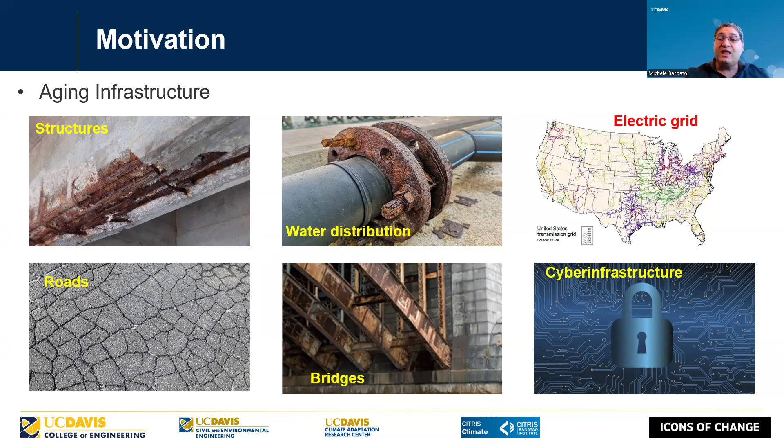In addition to that, we are also suffering a housing crisis. There is a severe supply shortage of housing in the United States and actually in the world. It is expected that in the next 50 to 80 years, we will need 2 billion new homes in order to address the increase in population and the improvement of quality of living in the world. So we need to find a way of producing affordable and sustainable housing for everybody.

At the same time, we have the big challenge of climate change with the issues in terms of mitigating the emissions, producing homes and infrastructure that are more sustainable, but also that can adapt to the changes and improve in resilience. And we need to do that with an eye to equity and climate justice so that everybody can benefit from the development and the improvement that are needed to address the problem of climate change.

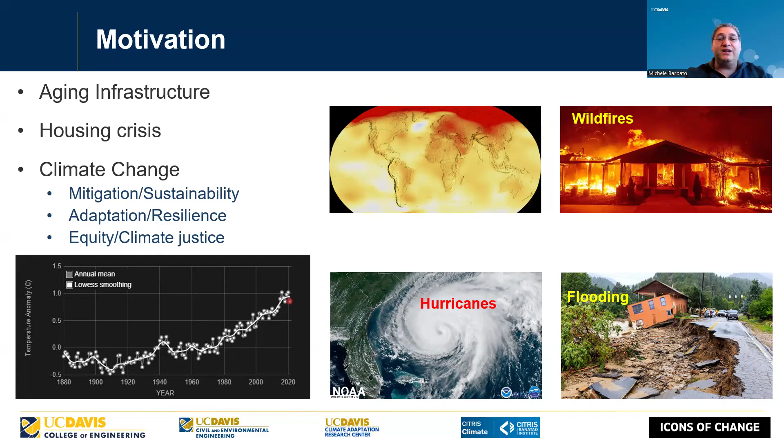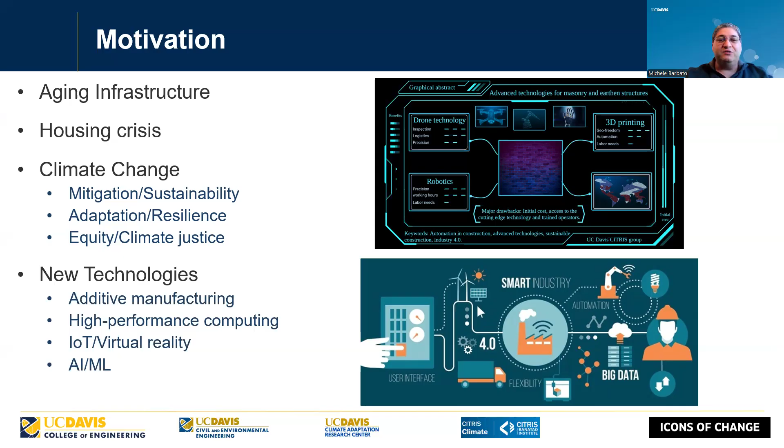At the same time, we have a big opportunity thanks to the new technologies that have been developed, such as additive manufacturing and 3D printing, high-performance computing, virtual reality, and artificial intelligence and machine learning. So these are tools that are becoming available and that can help us in addressing the issues that we have identified before. So how is the research of my research group addressing this problem, and where are we providing our contribution? On one side, we are developing nature-based solutions.

We are developing new engineering knowledge for earth construction that is characterized by low embodied energy, low operational energy, so highly sustainable materials that are also very resistant to natural hazards, including hurricanes, fires, tornadoes. Here you can see a fire test on our earth block and a windborne debris impact test of our earth

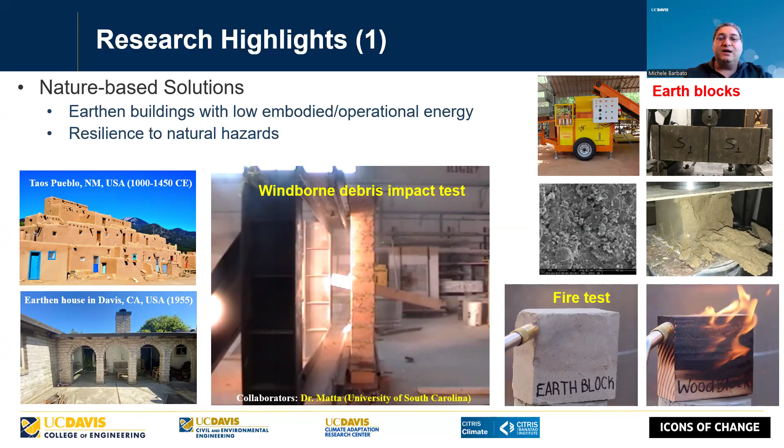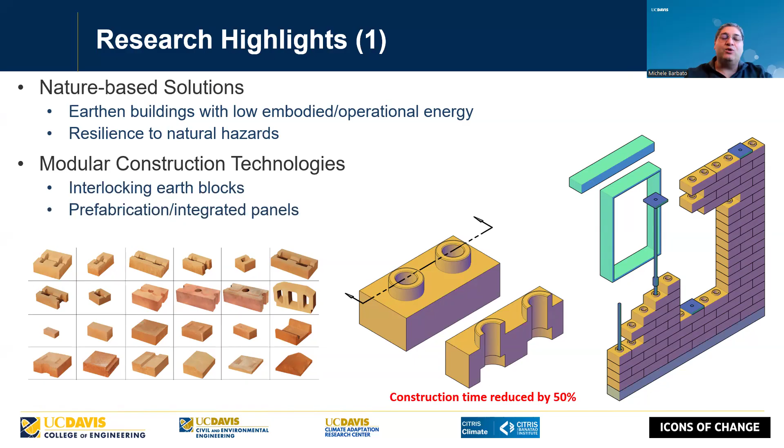blocks construction. We are also developing modular construction technologies, for example, interlocking mortarless earth blocks and prefabricated or integrated panels that can be used so that we reduce the waste of materials during construction and we make the construction more efficient and sustainable. And we can also reduce construction time with our technology of interlocking mortarless blocks up to 50%.

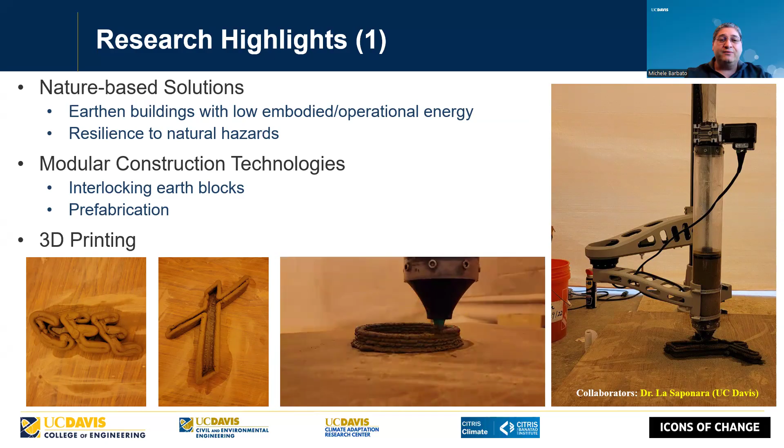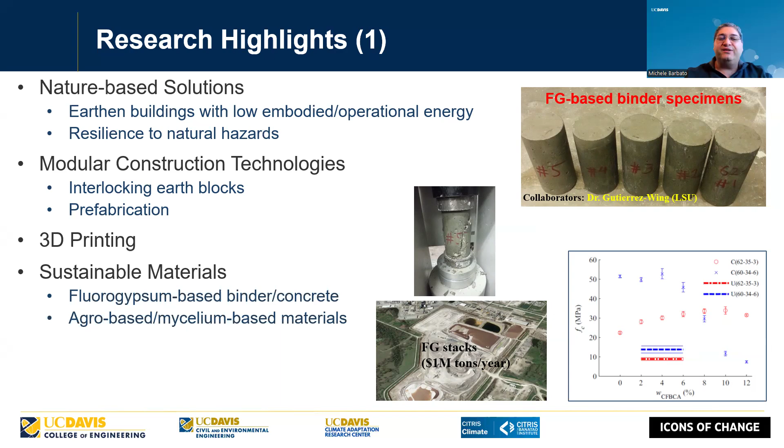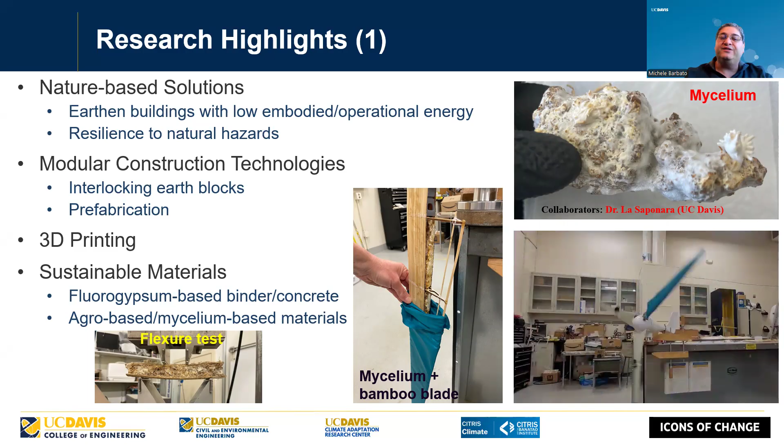We are also working on 3D printing. On one side, the more classical 3D printing of cementitious materials, but we are also working on 3D printing of soil-based materials, again, in order to achieve at the same time sustainability, affordability, and safety. And then we are working on other types of sustainable materials, on binders and concrete that are substituting clinker with, for example, fluorogypsum, with agro-based materials, with mycelium research that is using fundamentally mushrooms to build materials that can be used for construction of buildings and also to substitute blades of wind turbines.

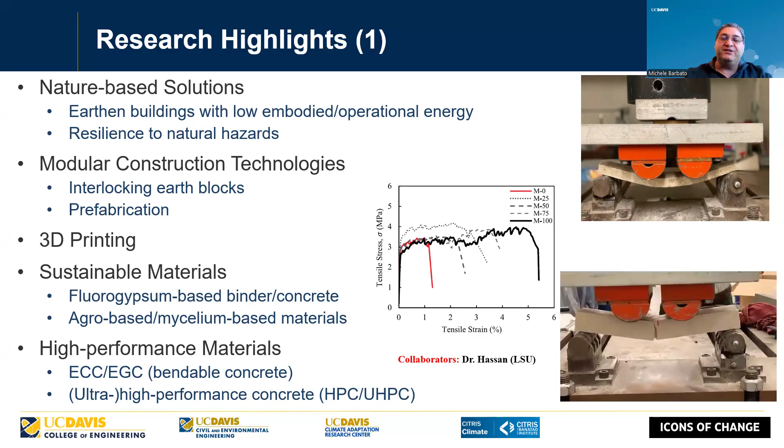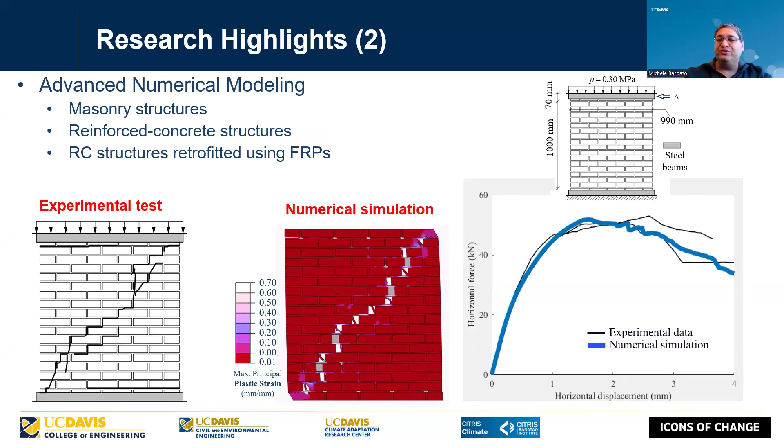And then we are working on high performance materials, on engineered cementitious composites and engineered geopolymer composites that produce fundamentally a bendable concrete that can deform much more than normal concrete and reduce damage or self-repair, as well as high performance and ultra high performance concrete. We also are developing advanced numerical modeling for masonry, for reinforced concrete structures, for reinforced concrete structures retrofitted using FRP. And here you can see one of our models and the capabilities of reproducing the mechanical behavior of masonry walls.

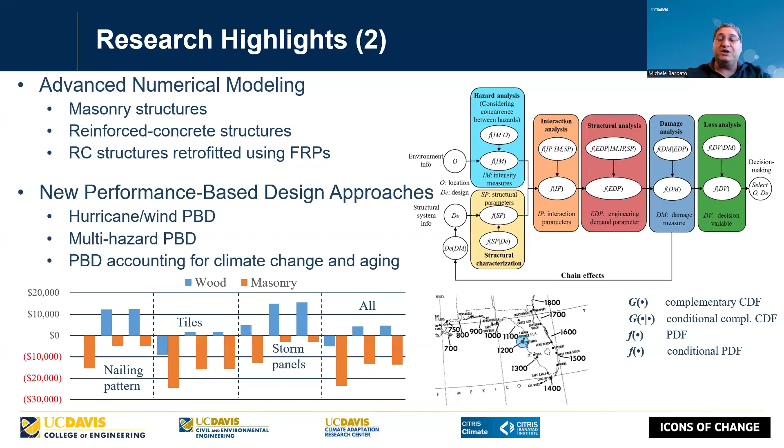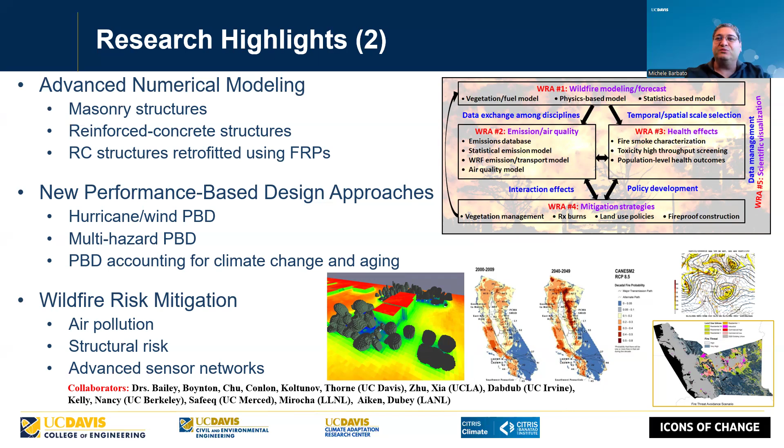We are also developing new performance-based design approaches for hurricanes, for winds, for multi-hazard problems, and for accounting for the effect of climate change and structural aging. And then we are working on wildfire risk mitigation, which is a huge problem, not only here in California, but really everywhere in the world, with all of the different facets of air pollution, structural risk, and the development of highly technological solutions for sensing early fire detection, in order to save communities, populations, and individuals from the risk associated with wildfires.

With all of that, we also have a vision for the future. We are trying to develop what we call the house of the future, that is using earthen construction, geopolymer buildings, materials that are reducing the emissions, improving the sustainability, reducing the cost, making the house available to everybody, but also that are connecting with the novel technologies that are now available. For example, with the Internet of Things, integrating buildings that can also provide service to the occupants and connected with the communities in order to provide additional safety.

And then we are also working toward the community of the future, something that uses distributed renewable energy in order to both reduce pollution and increase the resilience of communities under critical events like wildfires. And we are developing methodologies for climate-driven risk mitigation at the community level. We are also looking at technologies beyond our planet, development of Mars blocks for construction on Mars, supporting extraplanetary exploration and colonization. And we are also developing facilities for testing of our materials under severe wildfire conditions.

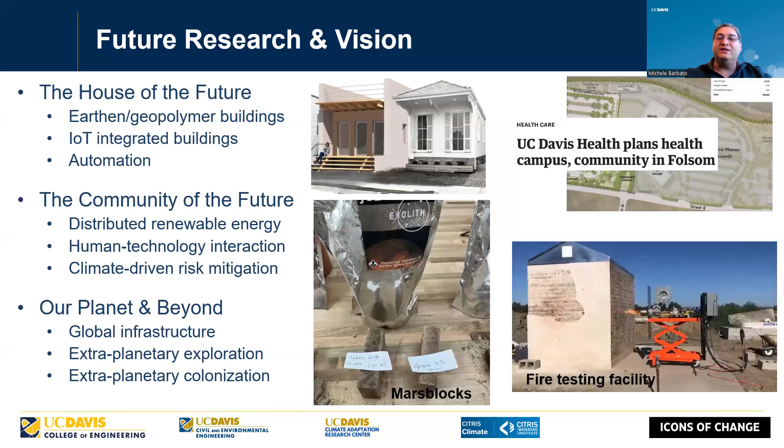And so with all of these, I'd like to conclude by thanking again the award committee for the Icons of Change award and recognize the importance of all the collaborators that across the years have supported and helped this research, including my mentors, Dr. Conte, Dr. Ciampoli, Dr. Spacone, Dr. Monti, my mentees, a long list of very talented individuals that are doing great work after working with me, and then the multiple teams that I've been blessed to work with over the years, as well as the funding agencies, because all of this research without support, funding, and trust is impossible.